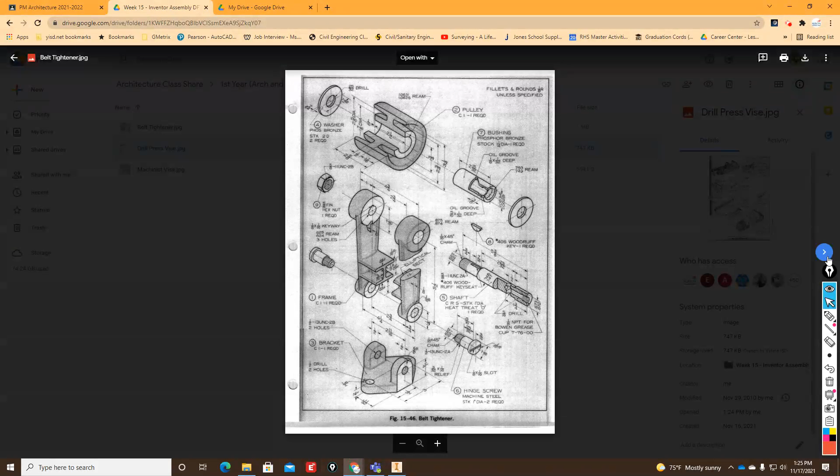So I'm not expecting you guys to work on these for a grade. This is just more for practice purposes. This is the one that I am going to be asking for a grade.

If there's any students that would want to compete in SkillsUSA competition, you need to be at this level. Okay, so it's really not that hard.

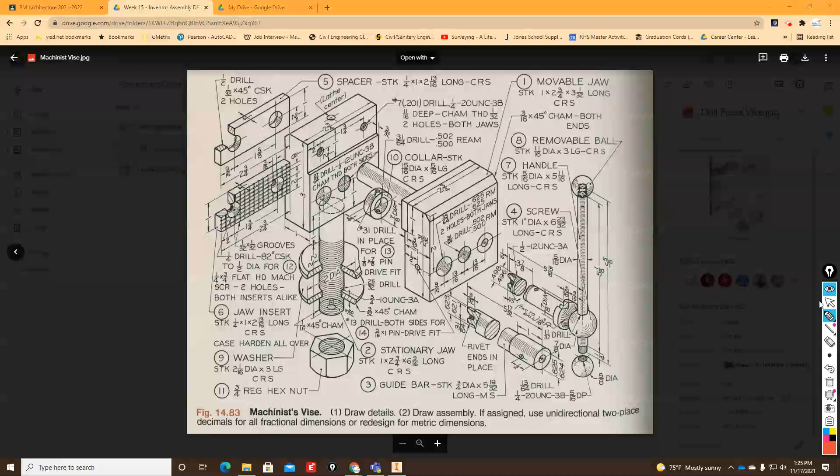As a matter of fact, let me explain this one just so you know what an assembly takes care of. The assembly is basically the whole thing all put together. But just like on the drill press vise, if you look at it, the part that we're going to eventually accomplish is actually this part right in here.

That's what's called the assembly, so the assembly is all of this put together.

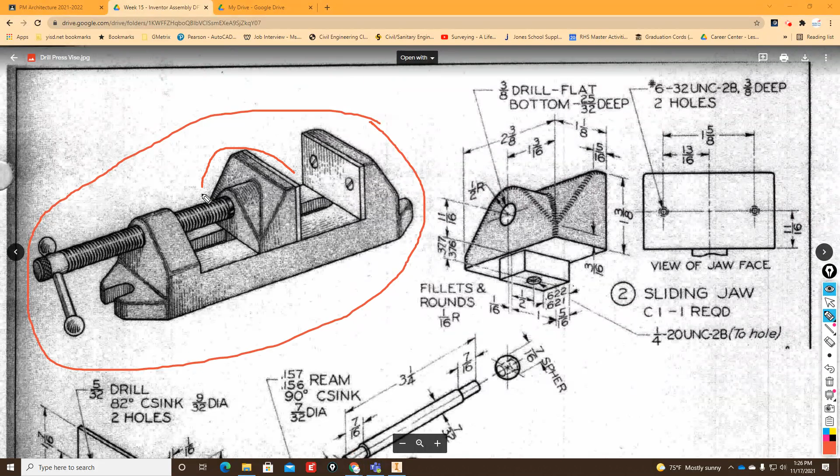So what you need to do, at least for the first part, is design all the individual part files. For example, right in here, this is the sliding jaw. The sliding jaw is going to be one part, and this is the information.

This is the view of the jaw face. So this face is actually this edge right here of the sliding jaw. Okay, so we have to design and create the part file for that one.

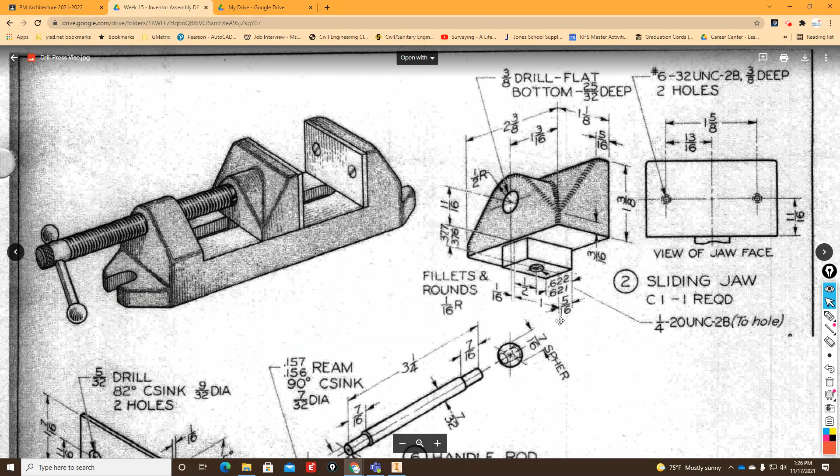And then we're going to eventually need the handle rod, the handle ball, and the jaw plate. All of those are the individual part files that we need to create, and I'll tell you where to store them here in a little bit.

But just like the handle rod, it's going to take this part right in here. That's going to be the handle rod part. It's going to be an individual Inventor file.

And then eventually we're going to assemble it, put it right in here. The handle ball, even though it says two, we're only going to do one for now. You're going to make only one. And there's the handle ball, there's the one right in here.

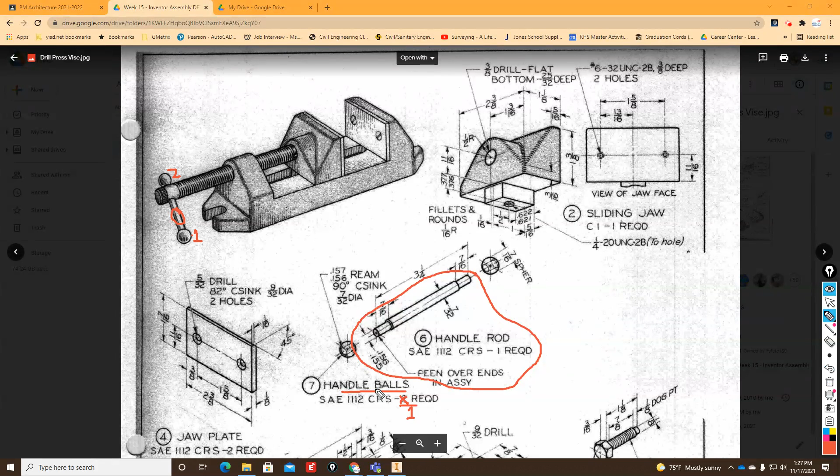And that's basically what we're going to be doing as far as the assembly. You're going to have the jaw plate, a retainer screw, retainer plate, the main screw in the middle, and then the base, okay? So these are the individual part files.

The one that you're not going to design, but is going to be part of the assembly, is these machine screws. This is another thing I'll show you, how to get to it from Inventor, because Inventor has a pre-built library of parts that exists, so I'll show you how to get to that library, and that's where you'll extract the machine screws.

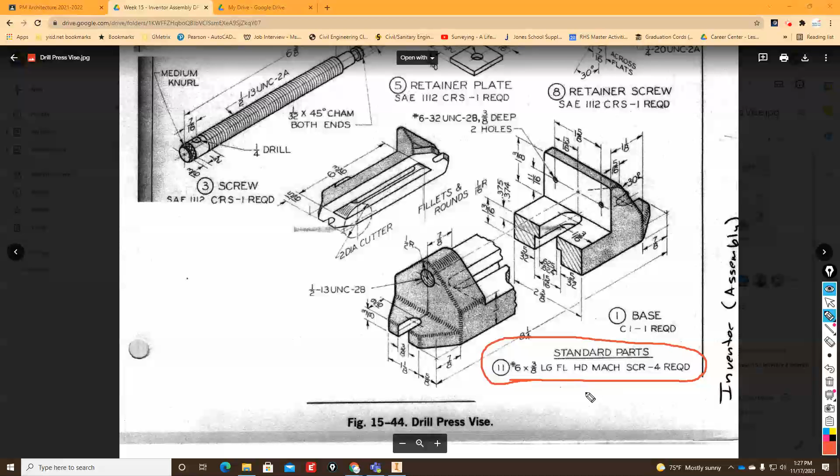But that's really not a part until we get to the assembly, so this is the only one that you don't have to do. The rest of them you do. And this is all the information for that.

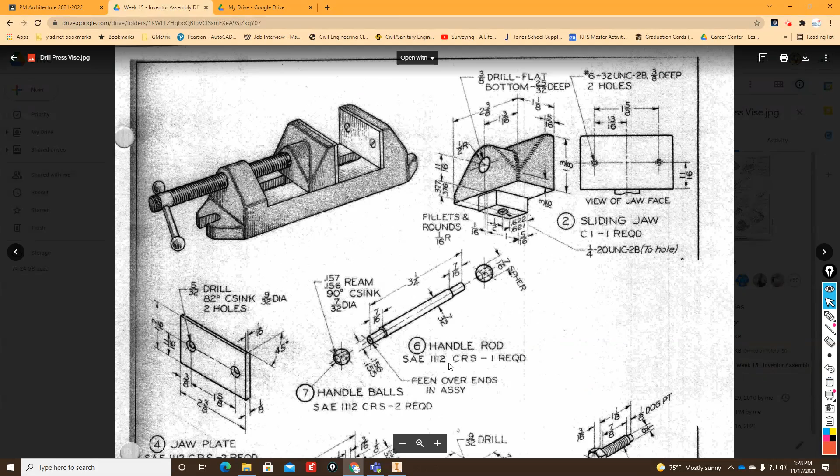And then eventually we are going to put them together in the assembly file. So that assembly file is what we're going to try to accomplish, but we need to design these individual parts first. So remember, on Inventor, you always start with the parts. So we're going to start with the part files.

That's what we're going to be doing first. We're kind of familiar with the part files already—you guys have done drawings on B-size paper with the title block, your name, and dimensions. For the assembly, we don't need that, but eventually we'll get to the assembly. The assembly takes all the individual parts you're going to do and puts them together to create the assembly. That's the next task for this drill press vise.

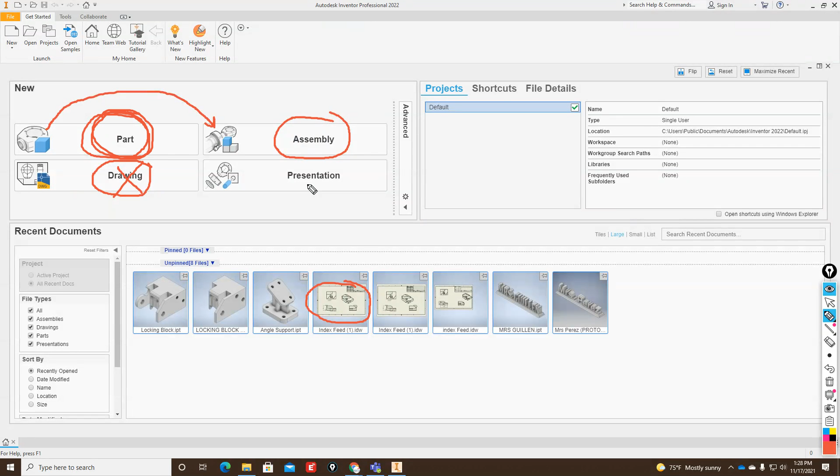First things first, we need to take care of all the individual part files. Once we have all the part files, I'll show you next how to create the assembly, which, to be honest, won't be until next week. So we're going to start with the part file, then the assembly.

Now, when we create the assembly—well, let me start with this first. Where do I want you guys to put those files? On your drive, you should have a folder that I created for you. I happen to be just using the Timmy Turner name.

Under your folder, you should already have two subfolders: 1309, which is our basic CAD dual credit class with Inventor and AutoCAD that we're working with today, and 1317, your residential planning. These are the only folders you should have at this point. All your 1309 work goes here, 1317 here. Next semester we'll be creating 2321 and 2330, our civil drafting courses starting in January.

We'll talk about that a little later—not for this semester, by the way. So, 1309 and 1317. Under 1309, this is just a sample folder, but here you should have all your Inventor part files, drawing files, cross base, fixture base, and all that. Under 1317, that's residential planning—I don't think I have anything in there, maybe just the floor plan for a demonstration. But under 1309 is where I want you to put the drill press vise.

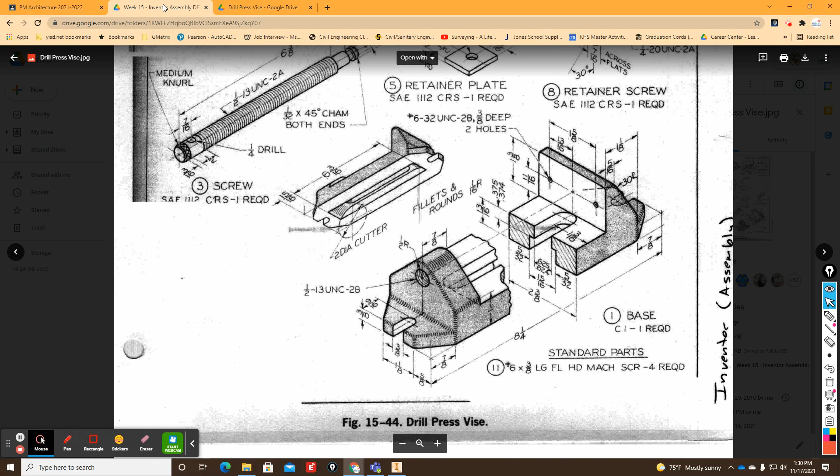Under that folder is where I want you guys to open and create the new file. Which new file? The base, the retainer plate, the screw, the jaw plate, the handle rod—you're going to do those individually. Looking at everything all at once, it kind of looks scary. But just like this one too, you look at it and think, oh my gosh, it's a lot of work. It kind of is, but it really isn't that hard.

So in this case, if you look at the spacer, look at what it entails—it's really just that right there. A very simple 2 3/4 by 1 inch rectangle, extruded 1/4 of an inch with two drill holes. This could probably take you a whole whopping 5 minutes, if that.

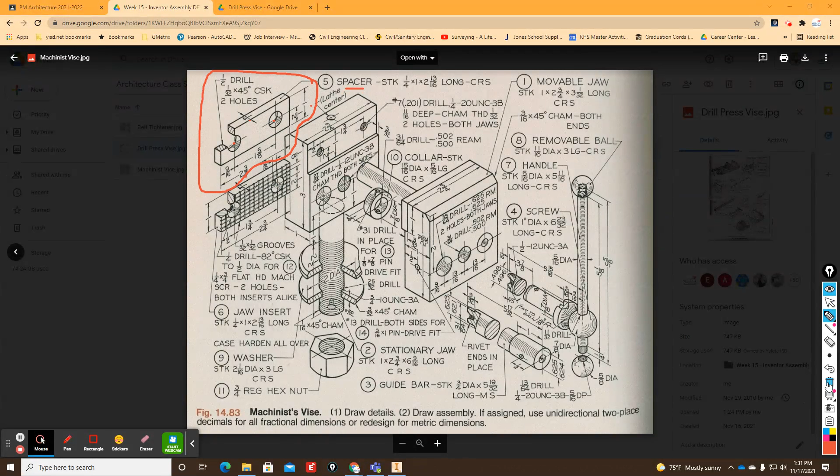And then you have the jaw insert—this is the information for the jaw insert. We're not going to do this one, but I'm just showing you how to disseminate an assembly if you ever see one. It's just all these individual drawing files, and that's really the same thing with our drill press vise—it's just individual files. So you look at the individual files, like the retainer plate.

Look at this information here for the retainer plate. Really simple: you go and create the retainer plate, save as, and you're going to save it under the drill press vise folder, okay?

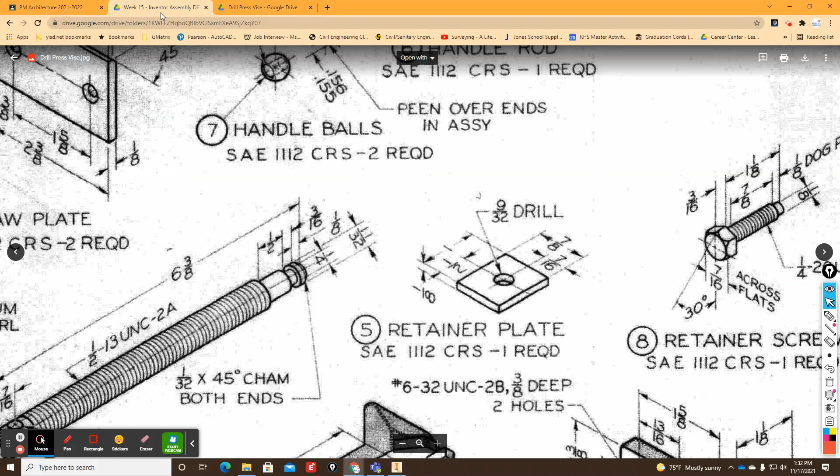How am I going to grade it? I don't want you to submit, because then you'd have to submit a total of 8 or 9, maybe 11, different part files. That's several files I really don't want submitted. So the way I'm going to check it is I'm going to create an assignment with nothing to submit. On the due date, I'm going to go and check your folder.

I'm going to go to the folder I've created for you, the one for this school year. I'll go to the PM class or AM class, go to the students folder, and check what they have. I hope it's in there, and that's how you're going to get your grades. So this should be a simple, easy 100 as long as everything's there and looks correct.

So that's basically what we need to be doing for this project at this point. The next phase will be the assembly. I have to create another video to show you how to create the assembly, because it is a different format. Even creating the assembly file is a little bit different.

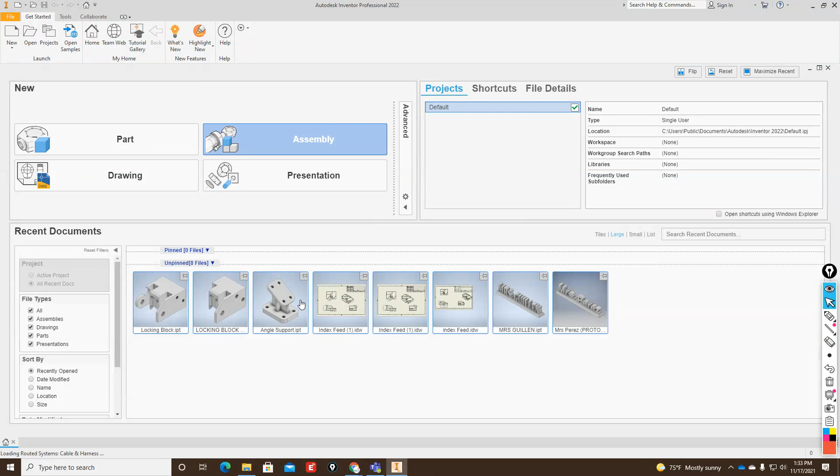The assembly is going to take all the individual parts and assemble them. But we also have to constrain them using assembly constraints and joint constraints, all these other types of constraints. You'll notice this is way different, so I will have to show you how to do that.

The only thing that kind of worries me is for you to submit the assembly when you do a file save as, which is what I'm going to want you guys to do. At one point it's going to create the assembly file, but it also links itself to all your individual files. So for future reference, I'm more than likely going to have you guys still create the assembly, but after that I'm going to want us to create a presentation of it.

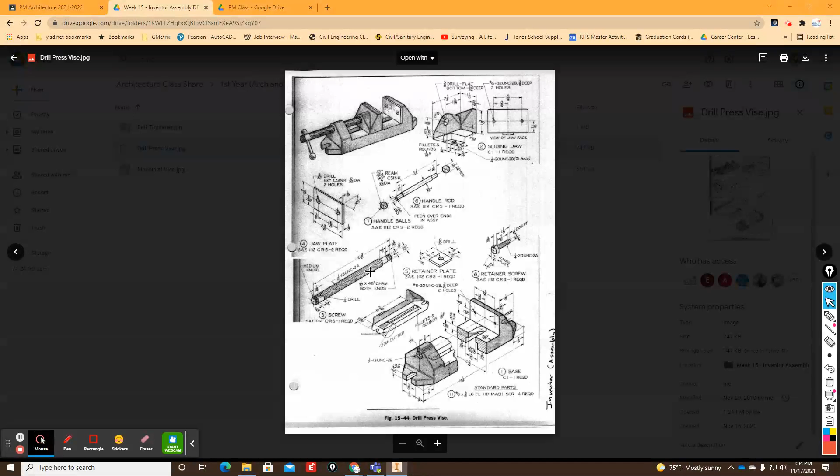So the files we're going to be working with for now, to begin with, are the part files. The first thing we'll do is work with all the individual part files I mentioned. On the next video, I'm going to show you how to create the assembly to put everything together with the individual parts. We're not going to create a drawing, so don't worry about that.

But the last thing we're going to do is create a presentation. This creates a presentation of an assembly, and it can actually be animated. You can put notes on there and stuff. I'll be honest with you, I've never done this before.

So this is how I'm going to have you guys create your file to submit once we get to the assembly. Once you finish the assembly, I'm going to have you create a presentation of the assembly, and then you'll submit your presentation. You can actually make this into a video, from the little bit that I know, but at this point I don't know how to do that. So I guess we're going to find out all together how we're going to do our presentation.

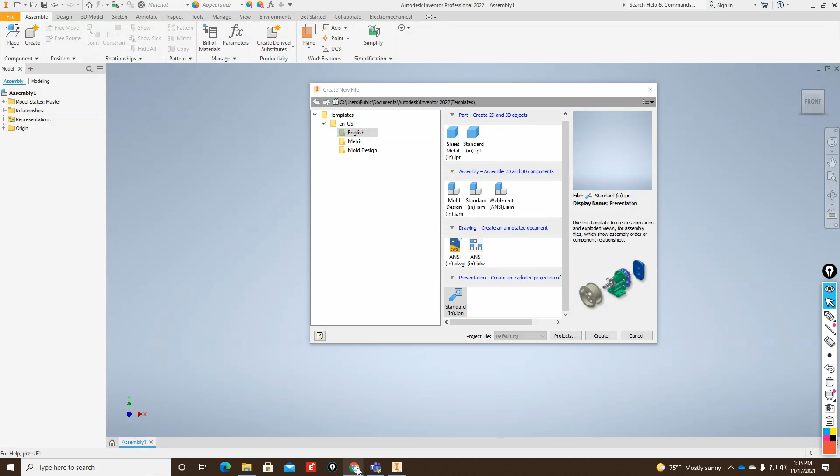First things first, let's work on our individual part files. Save them on your Google Drive, in that folder I'm asking you guys to create. Just to recap: My Drive, Timmy Turner, 1309, drill press vise, and in here you'll have all the individual parts that I'm going to be checking for a grade when the assignment is posted.